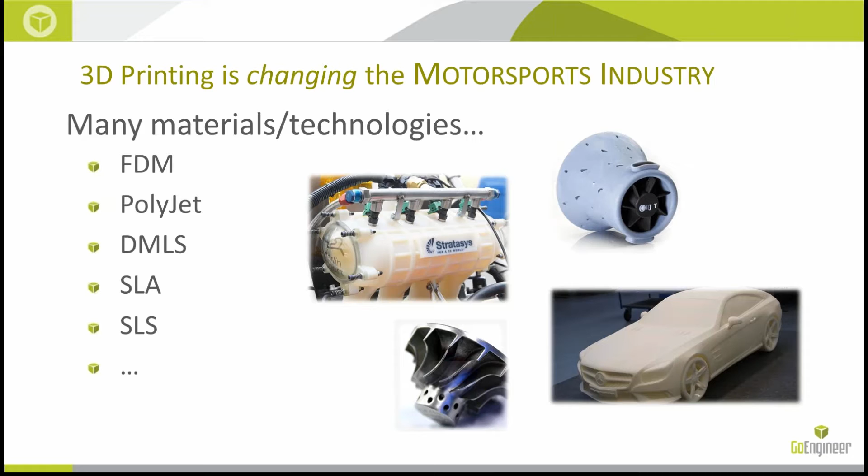Starting from a general sense, there are many different technologies that I'm sure people have heard of here - FDM, PolyJet, DMLS, SLA, SLS - and we've got an example of some parts here. What I want to concentrate on is that these are all working towards the same goals. So no matter what the technology is or what the material is, think of 3D printing as more of a toolbox than a magic bullet.

Our goals are to produce new, novel parts, more innovation, better results. And for motorsports specifically, what we're talking about is a better return on sponsor investment. So that's kind of an overall theme that I'll be coming back to.

Novel designs - this one's pretty easy to wrap your head around. We've got geometries that are either impossible or very difficult to produce using traditional manufacturing methods. We're always looking for reduced mass in motorsports.

Oh, I actually forgot to mention, I have a background in motorsports. I previously owned a company that did wiring and electronics for motorsports, participated in racing all the way from stock car racing to a little bit of open wheel stuff, a lot of production car based racing. So this is right in my wheelhouse.

So anyway, mass reduction is always a key component, and 3D printing lends itself very well to that. The other thing that people in manufacturing and large industry are very focused on, but motorsports maybe not as much, is cycle time.

From the minute that you have an idea to having something usable in your hand, whether that's a prototype or an end-use part, the cycle time is really compressed with 3D printing because there are just fewer steps. We're going to cover a couple of those workflows and how they've worked for a few of these applications, but whether it's manufacturing or design and prototyping, the reduced cycle time is just as important as any of these other things.

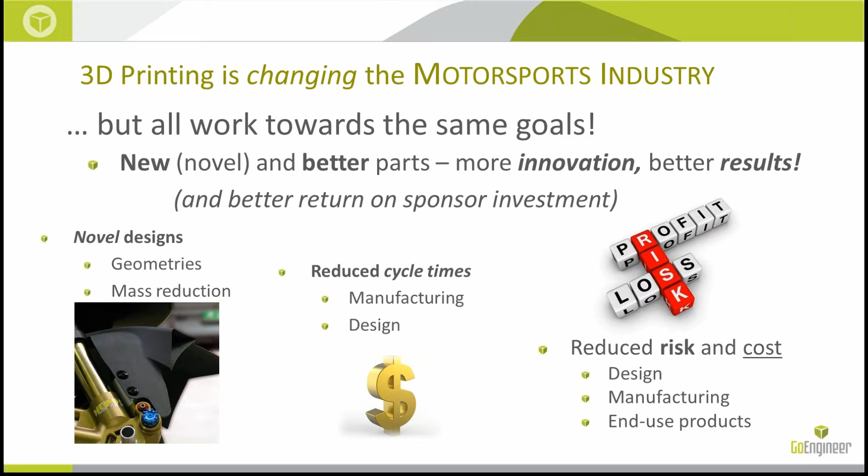So at GoEngineer we are a Stratasys value-added reseller. Stratasys, founded in 1989, is one of the big pioneers of 3D printing. They currently have over 600 additive manufacturing patents. The big one for this presentation - Stratasys was awarded Motorsport Technology of the Year last year at Motorsport World Expo.

Motorsport World Expo in Cologne, Germany last year awarded Stratasys Motorsport Technology of the Year. So with everything that came out last year - electric vehicles, composites, all the technologies that have anything to do with motorsports - Stratasys was seen as making the biggest splash.

GoEngineer is a value-added reseller, started in 1984. The company's been around for a very long time. We started selling Stratasys printers a few years ago and have been very successful. Last year, we were the number 1 worldwide reseller of 3D printers for Stratasys.

So we're coming from a place of knowledge because we're a great partner of Stratasys, we get to see a lot of the cool projects and a lot of the cool parts. And as an application engineer, that's where I get to have the most fun. So diving into some of these applications, I didn't want to spend too much time on the intro.

The first one is motorcycle road racing, and this is just a great example that's nice to look at. These are sexy parts. This was a MotoGP bike, 250cc class.

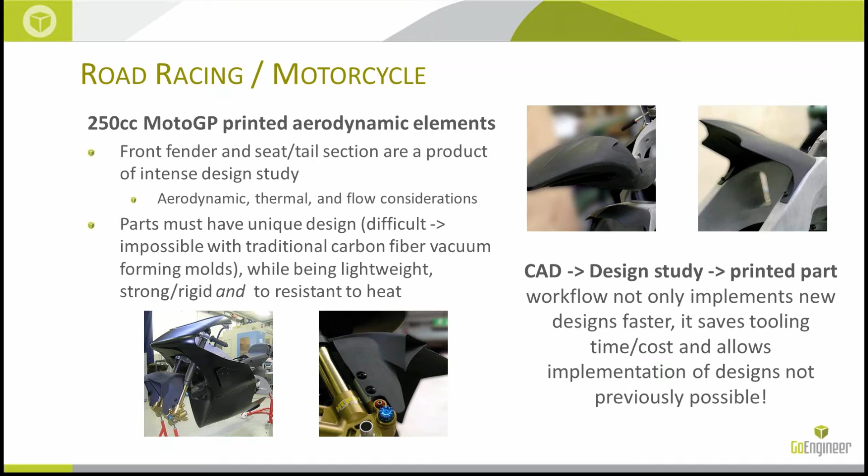And we're thinking about motorsports teams where your resources are severely limited. Even at the MotoGP level, they only have a few guys doing the composites for the bike. So being able to directly print these parts is a huge time savings, and if we can do something that allows better overall functionality of the motorcycle, that's a huge bonus as well.

This is one that I'm especially fond of, the Koenigsegg 1-to-1. This was 1 horsepower per kilogram, where they got that name from. They're going for the fastest car in the world title. This is what I call the production automotive category, but let's be honest, it's pretty low volume.

Still some very cool stuff, and a really interesting bridge, because Koenigsegg is really riding the line between one-off things where 3D printing is very popular, and production where 3D printing has some manufacturing applications, but you're not really 3D printing the end-use part.

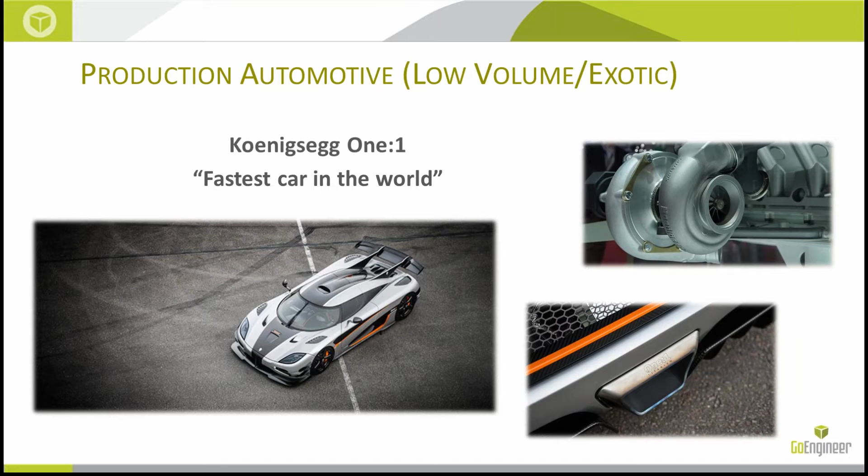So we've got some very cool end-use parts here. The first one is the turbine housing. Turbine housings function based on volume and flow. At low RPMs you'd like a smaller turbine housing; at high RPMs you'd like a larger turbine housing to get the optimal characteristics for a certain wheel.

So the goal was he wanted low-end spool without having a huge engine, and he wanted high-end power. Everybody that's dealt with turbochargers has some familiarity with this. So he designed this housing - I wish I had a cutaway view. There was a video where he showed a little bit of this really quickly, but he obviously didn't want to give it away.

So you have some really intricate geometry in there with 2 flow patterns - one for low end, the other for high end. They both basically change direction and size in all 3 dimensions, and you have a flap that basically moves gases between those 2 in variable levels.

So not only were they able to design this, he was able to print it. And not only was he able to print it, but it was half a kilogram, 500 grams lighter than their previous exhaust housing - and we're not talking about big rig truck exhaust housings, they were using an optimized housing before. So this is a really incredible thing. Metal 3D printing is something that Stratasys does not do at this point, but still, I had to put it in here.

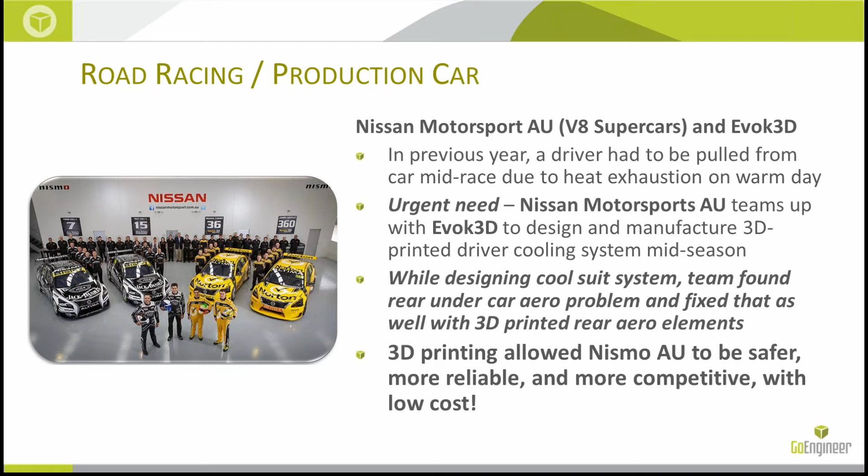Here we go. This next one is a big one, and this is a lot of, I think, why Stratasys was awarded Motorsport Technology of the Year. They partnered with Strakka Racing - I believe they're European guys, but the racing house is in the UK. They were developing the Dome S103 car, which competes in LMP2, so prototype racing, using both PolyJet and FDM technologies. And the team principal, he's all over the motorsports media, talking about how great this is and how much it was able to help.

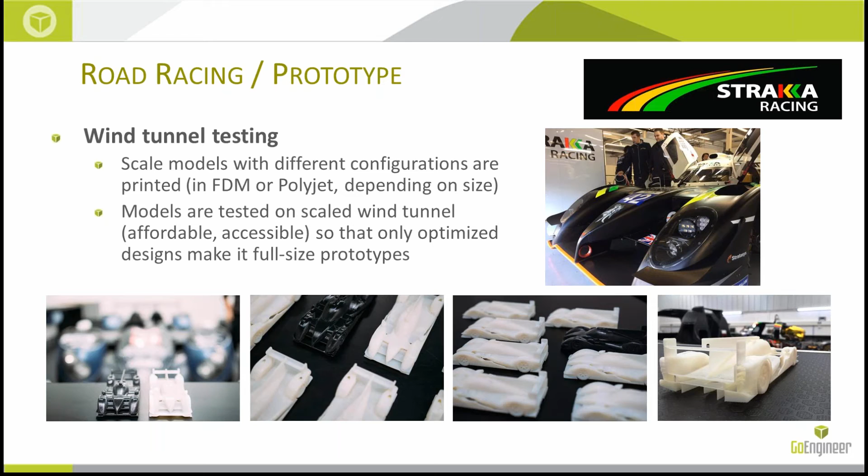All of these race cars have payloads which they have to carry — this is part of professional motorsports. You're racing in a series, that series sells its airtime to a network, that network pays to be able to broadcast this video. They want onboard video — everybody wants onboard video.

A lot of these cars are relying very heavily on telemetry. Gone are the days where the car comes in and they plug a computer into a port. They don't want to wait till the car comes in to see what's going on. They want to beam back telemetry.

So you've got these different radio and camera systems that need to be integrated into the car. You don't want to have to redesign the entire upper chassis piece to fit a different camera or radio. So what they did is design a modular mount piece that can be easily customized or reproduced for different payloads. And because it's all based on CAD, they know it's going to work. It's not like they have to prototype it, test it, and see if it fits. They know it's going to fit.

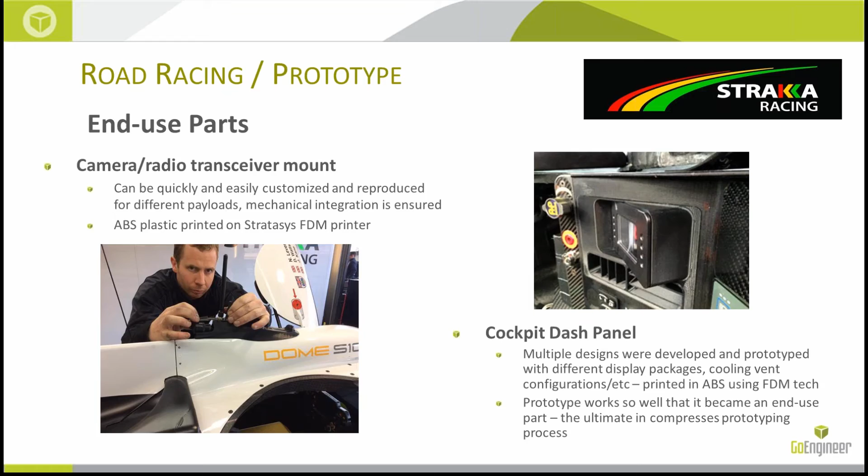Now onto more of a business side. This one was one of my favorites - a motorsport specific 3D print service bureau. Toyota Motorsports Group, which is what they now call it, it's had a few different names, but this is Toyota's F1 and WRC design house. They have a 300,000 square foot facility in Cologne, Germany, 30,000 square meters. Now that Toyota doesn't have an F1 program, they were wondering what to do with it, so they decided to team up with a company from the UK called 3D Parts to turn this into a motorsports specific service bureau. It's the perfect place to develop a race car.

They've got 10 or more - they used to have 10, I believe they've added more - SLA machines, which during F1 development, when they were running the F1 team out of there, ran 24/7 making thousands of parts per week. They have two super pricey EOS SLS machines, which can do a bunch of different materials - they use those for metal parts. They have 15 5-axis CNC machines, and carbon fiber layup for all the way up to full-size cars, so you've got an autoclave that'll do an entire car chassis or body. They've got two rolling road wind tunnels, one about 70% size and one full size, that'll go up to something like 200 miles an hour.

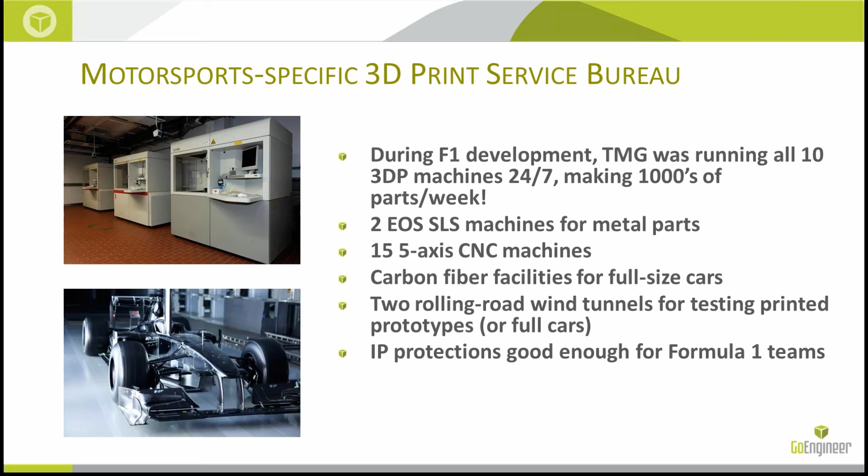This is a little compressed here. So to recap, 3D printing is changing the motorsports industry by allowing us to make new and better parts, more innovation, better results - this affects design time, cycle time, risk and cost. The teams that are, just like in industry elsewhere, adapting to this technology and really embracing it, like Strakka, are going to be the ones that are more successful. There are a lot of elements to a motorsports team, but this one is wide-reaching enough that the teams on board with this are going to be more successful.

And as far as technologies and brands, Stratasys is a huge one. They're definitely out there pushing forward to try to be as integrated as possible with this wave of motorsports teams that are embracing 3D printing. And here in the U.S., where GoEngineer is a reseller, I know I'm very interested in being a part of this. We don't have a huge motorsports presence here in Southern California, but I think it's something we're going to see more of and on more different levels. So we're very excited about it.

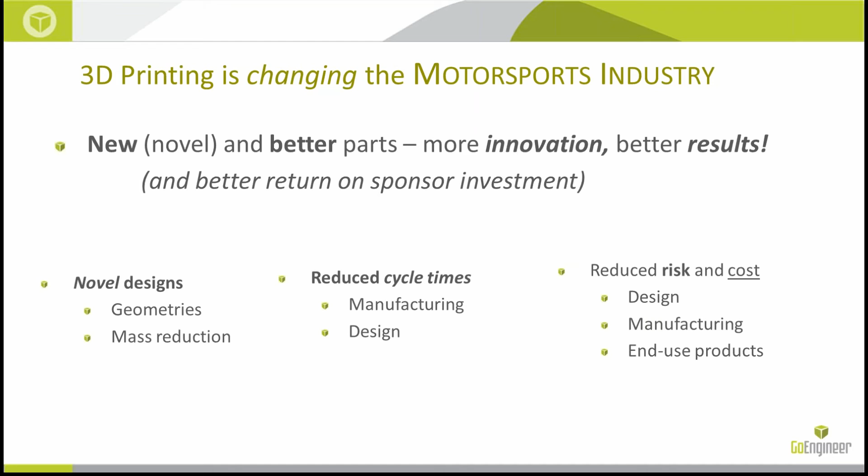So that brings me to our last slide. This is what we do. GoEngineer provides design and manufacturing tools with the expertise that enables customers to reduce costs, risk, and time required to go live with new technologies and ultimately new products. And that's especially key in motorsports, where you have to be continually innovating.

So I've got a couple of questions queued up here, and I'd be happy to take questions from any of you guys that are here. From Valentino: how fast is the printing?

That's a relatively complicated question. It's dependent on geometry and print technology. We have printers all the way from FDM printers at $6,000 that print in a 5x5x5 envelope — if you print a piece that maxes that size, it'd be a couple of hours — all the way up to our Fortus 900 or our Objet 1000, where print envelopes are 3 feet by 2 feet by 3 feet, and if you fill that space, you're going to be printing for a couple of days.

A 40-hour, 50-hour print is not unheard of for something that large. So if you have anything specific, a lot of times what we do with service bureau work or for people new to one of these technologies is take an STL file and run it through a time estimate, so we can tell down to the gram or the hundredth of a cubic inch how much material it'll take, and down to the minute how long it would take to print. Part interior, orientation, and material all play a factor.

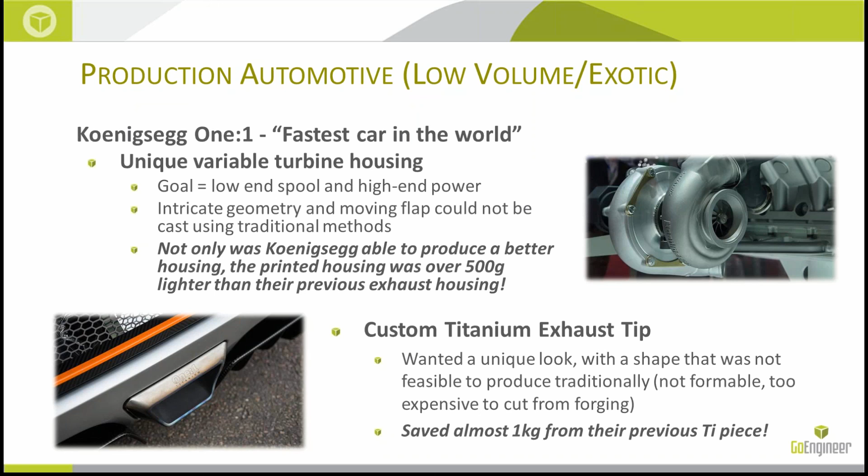Thomas asks for a good source to learn about different materials and machines. GoEngineer has a Stratasys page with some general information and a link to receive more. Depending on where you're located, we may be able to help you with that, or forward you to someone that can. Feel free to shoot me an email - I'm going to pop this back to the page with my email, jjordan@goengineer.com, and we can push you in the right direction. As far as learning about different materials and machines, Stratasys.com has a ton of information in a pretty accessible format for the Stratasys machines. I can't speak too much for the rest, although Google is definitely your friend.